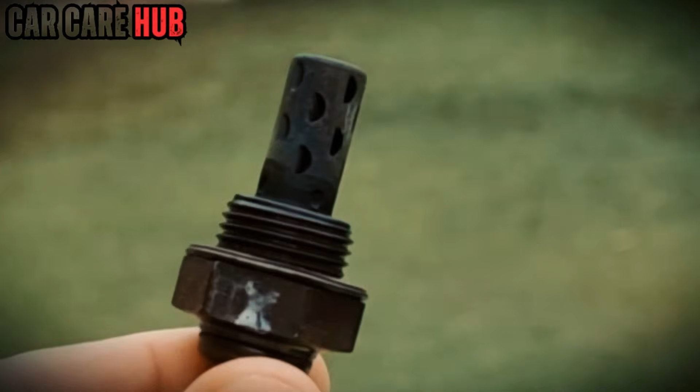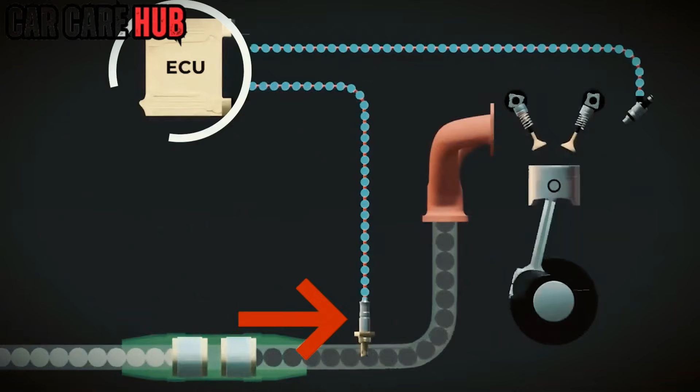Ever had a mechanic tell you that a $500 oxygen sensor replacement is the only way to turn off that glowing check engine light? Before you hand over your credit card, you need to know a secret the pros rarely share. Your sensor probably isn't broken, it's just suffocating. Over thousands of miles, a cocktail of cheap fuel and stop-and-go traffic coats your sensor in a thick, glass-like soot that effectively blinds your car's brain.

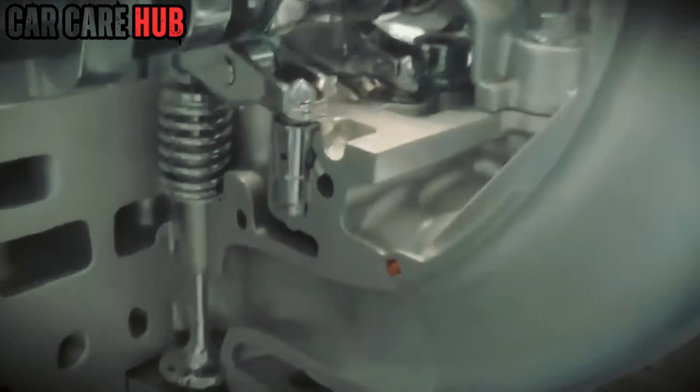When your engine can't see what it's burning, it defaults to rich mode, dumping extra fuel and tanking your MPG. Today, we're showing you how to perform a $10 rescue operation using 9 industry-vetted tricks to clean your O2 sensor, many without even turning a wrench. Trick number 9, the fuel additive tank-in method.

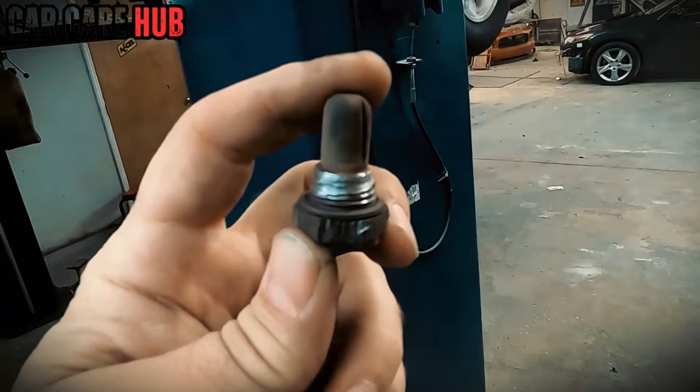Most drivers panic when they see a P0131 or P0135 code, assuming the hardware has physically failed. In reality, that sensor is usually just buried under a layer of carbon gummy bears, sticky, unburnt hydrocarbons that act like a blindfold. If you spend most of your time in city traffic, your exhaust never gets hot enough to burn this gunk off. Instead of a teardown, we start with a liquid technician.

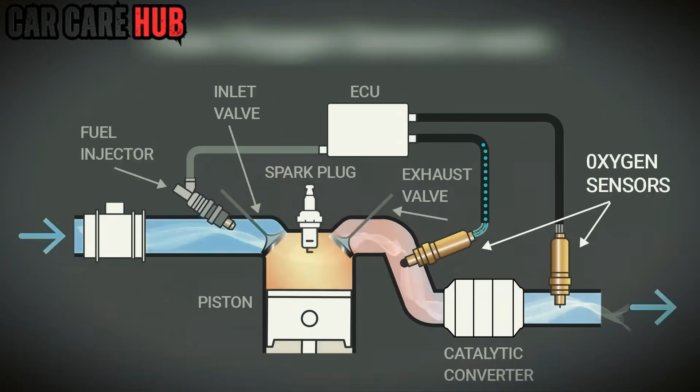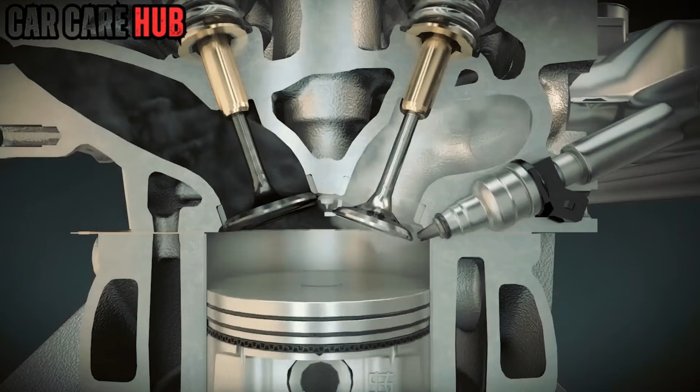You're looking for a high-performance fuel system cleaner, specifically one labeled O2 sensor safe or catalytic converter cleaner. These aren't your standard cheap detergents. They contain specialized polyetheramine (PEA) compounds that survive the combustion chamber. As these chemicals turn into a high-temperature vapor, they scrub the sensor tip as they exit the exhaust.

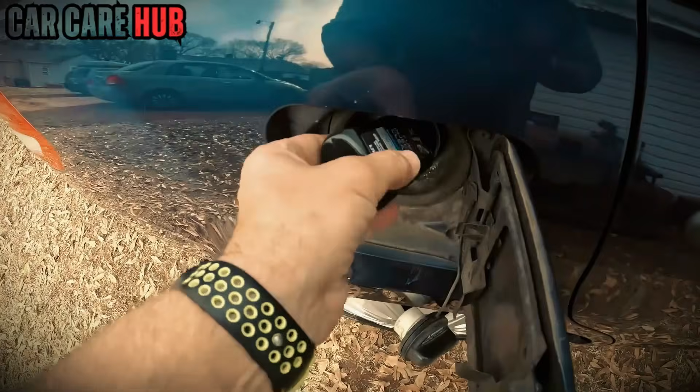Pro tip: for maximum potency, wait until your tank is at 1/4 full before adding the bottle. This concentration ensures the chemical-to-fuel ratio is aggressive enough to actually dissolve carbon. Drive it for 20 miles at varied speeds. You'll likely feel that low-end stumble at stoplights begin to vanish as the sensor starts seeing oxygen levels clearly again.

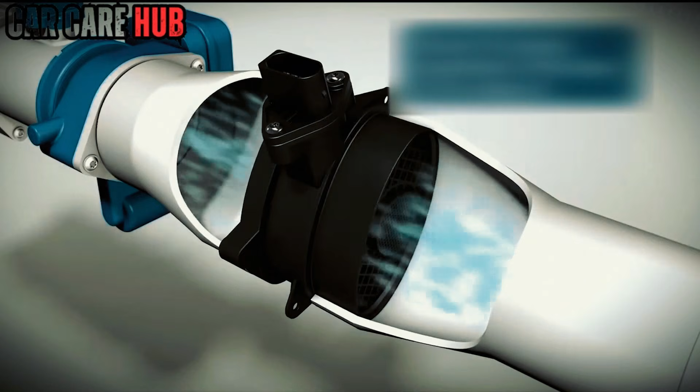Trick number 8, the intake vacuum sip. In a high-volume repair shop, time is money. A master tech doesn't have a week to wait for a tank of treated fuel to circulate. They use what we call a direct strike. This method turns your engine's own vacuum system into a delivery straw, pulling cleaning agents directly into the intake manifold.

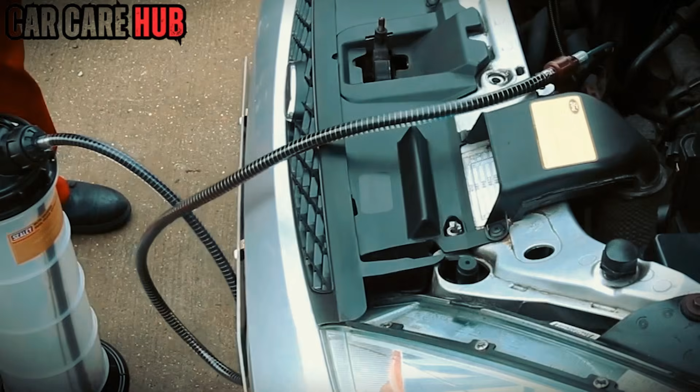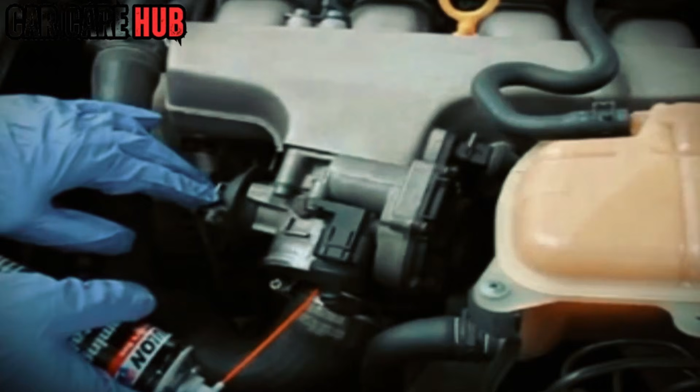By disconnecting a major vacuum line, typically the brake booster hose, and allowing the engine to sip a specialized aerosol cleaner while holding the RPMs at a steady 2000, you create a chemical fog. This atomized mist hits the O2 sensor at high velocity. It's essentially an internal pressure wash for the sensor's delicate zirconium element.

If you see a massive cloud of white smoke from the tailpipe, stay calm. That's just years of engine blindness being purged in real time. It's a 10-minute procedure that can instantly restore throttle response that's been missing for years. Trick number 7, the Italian tune-up.

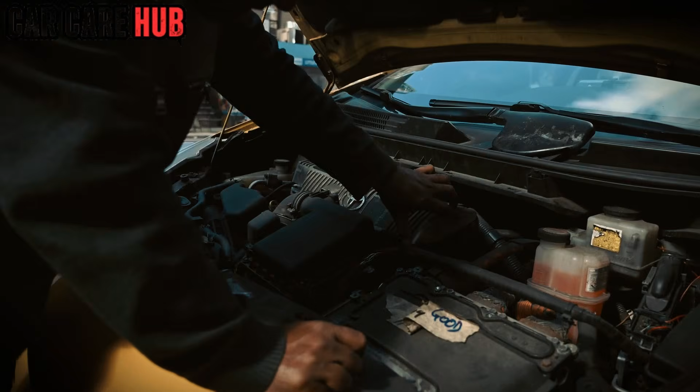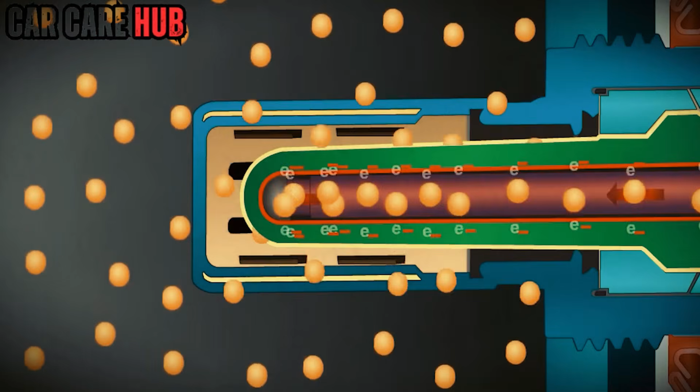Long before we had sophisticated scanners, old-school mechanics relied on thermal intervention. They noticed that grocery getters, cars driven only short distances, choked up much faster than highway cruisers. The reason? The O2 sensor needs to reach about 600 degrees F to even start working, but it needs significantly more heat to stay clean. The Italian tune-up uses no chemicals, just physics.

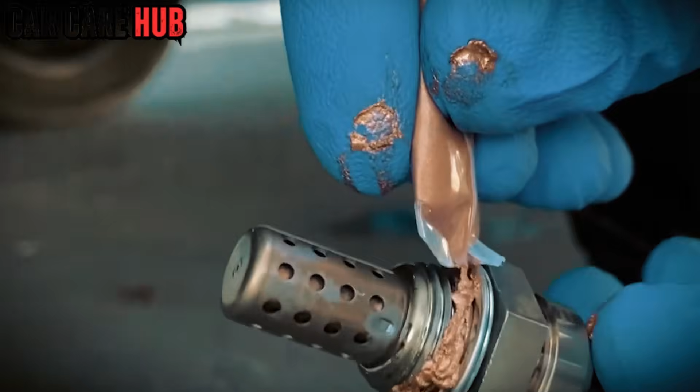By driving at highway speeds in a lower gear, keeping your RPMs between 3000 and 4000 for 15 minutes, you raise exhaust gas temperatures to their peak. This turns your exhaust system into a self-cleaning oven, incinerating soft carbon into a fine white ash that simply blows out the back. It's a zero-cost way to reset your fuel trims. I recommend doing this once a month to prevent carbon from ever getting a foothold on your sensor's tip.

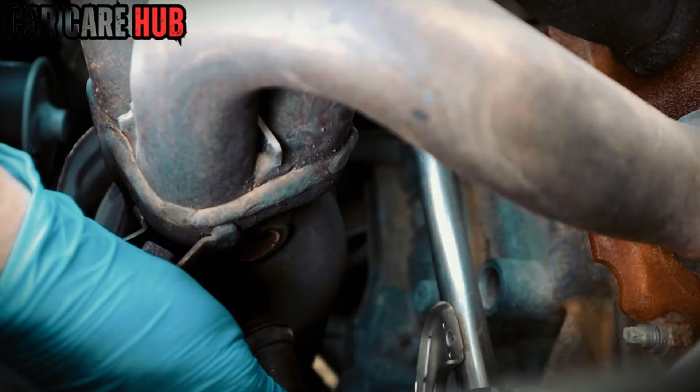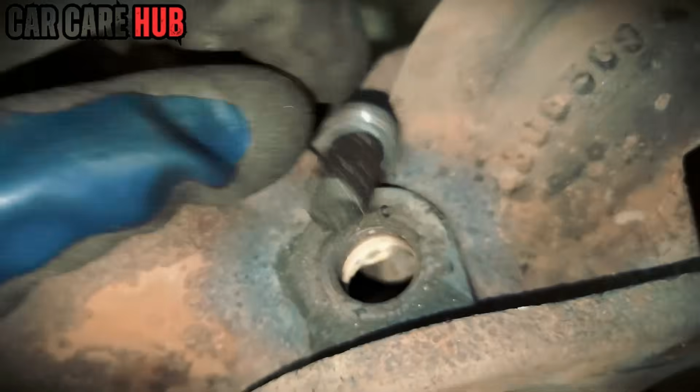Trick number 6, the vinegar and baking soda bubble. There's a common myth in the industry that once a sensor is poisoned by mineral deposits, it's scrap. I've seen countless DIYers fire the parts cannon, wasting hundreds of dollars because the carbon was baked on too hard for a spray to fix. But you can actually use basic chemistry to save it.

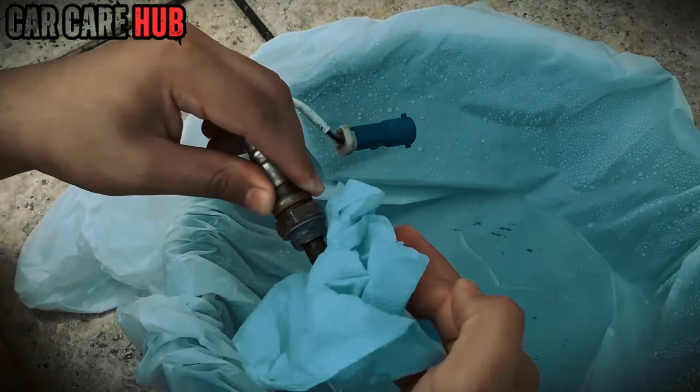This trick requires removing the sensor and submerging just the metal tip in distilled white vinegar. The mild acetic acid works to break down the calcified ash that thermal cleaning can't touch. When you add a spoonful of baking soda, the resulting CO2 reaction creates a mechanical fizzing that lifts loosened debris out of the internal sensing element. It's a pennies on the dollar recovery.

When the liquid turns murky black, you know you've just saved yourself a trip to the parts store. Just remember, rinse with distilled water and dry it completely before reinstallation.

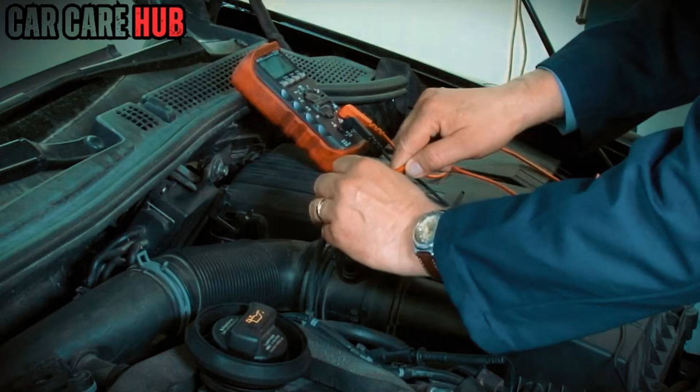Trick number 5, the gasoline or acetone bath. In performance shops where engines run rich and oil blow-by is common, sensors often get coated in a varnish, a plastic-like film that standard cleaners can't penetrate. This is the heavy artillery. You have to fight fuel-based contaminants with fuel-based solvents.

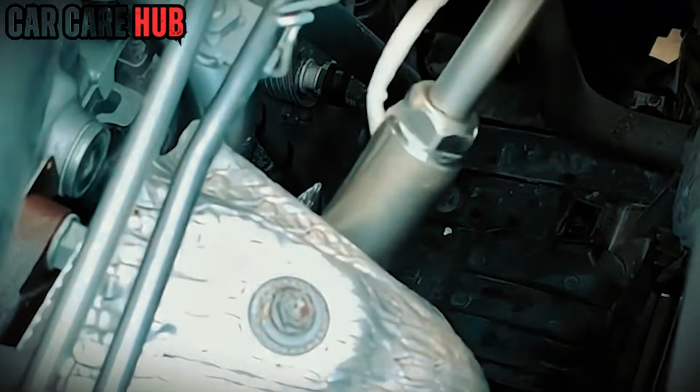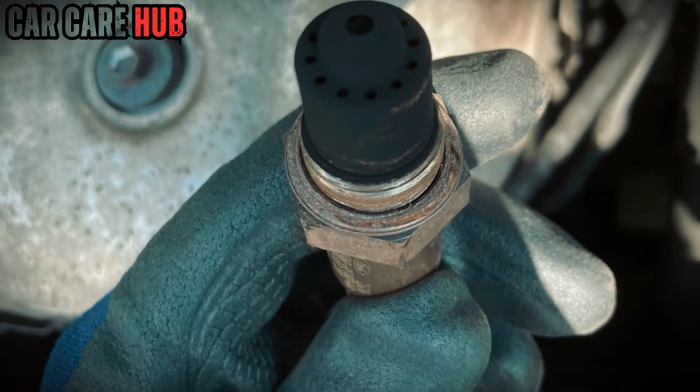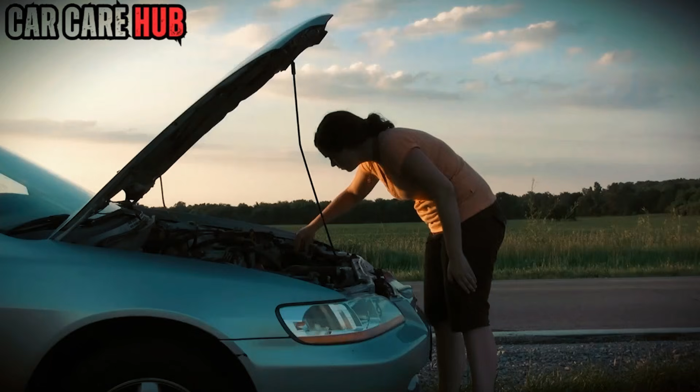By soaking the sensor tip overnight in a bath of gasoline or high-grade acetone, you're using industrial-strength solvents to melt away that greasy varnish. These chemicals penetrate the tiny ventilation windows in the sensor's shroud to reach the ceramic bulb inside. By morning, a sensor that looked like a charcoal briquette will often look like brand new stainless steel. If your idle has been surging or hunting, this deep solvent soak is often the only thing that can bring it back to a steady 800 RPM.

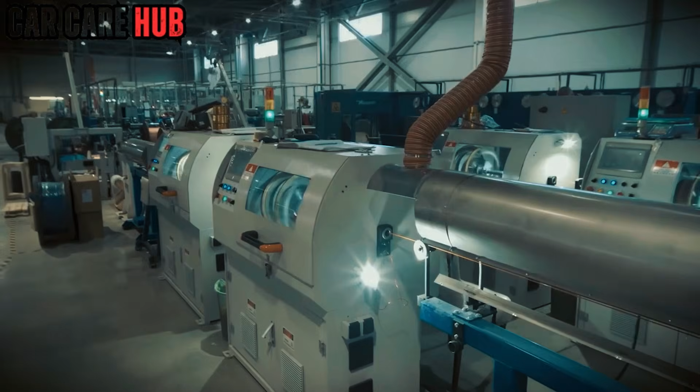Trick number 4, specialized oxygen sensor spray. Precision matters. A major mistake I see is people using heavy degreasers or brake cleaners on an O2 sensor. Those cleaners often leave behind a microscopic oily residue. Once that residue hits 600 degrees, it bakes into a permanent insulator, effectively killing the sensor for good.

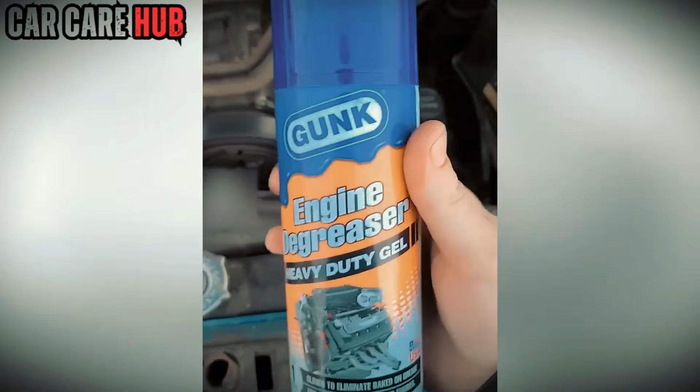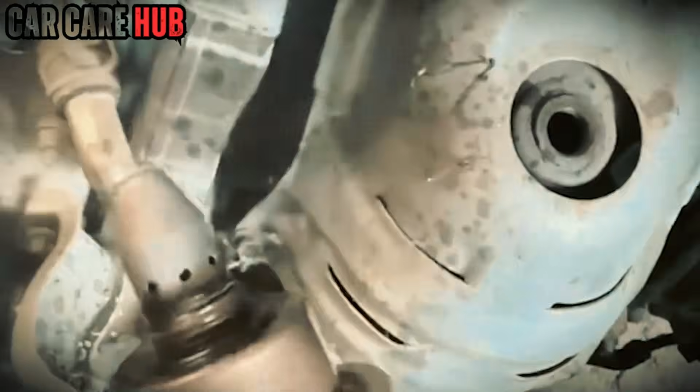Dedicated O2 sensor sprays are engineered to be zero residue. They flash evaporate in seconds. When you use this, you're blasting the spray directly into the shroud holes to flush out contaminants. It's a professional-grade dry clean for your engine's most sensitive probe. It's the most reliable way to get a professional result in your driveway without the risk of contaminating the delicate internal circuitry.

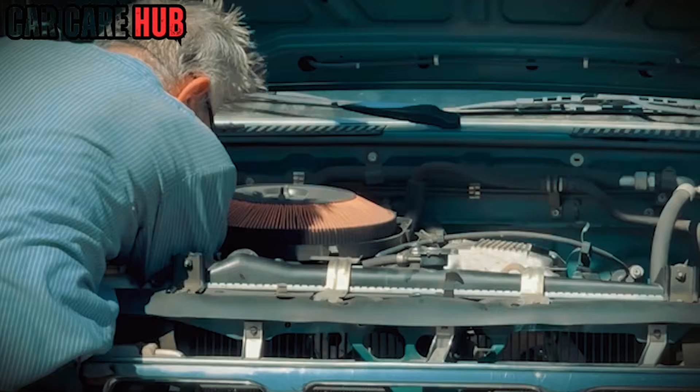Trick number 3, the soft nylon scrub. I once saw a veteran tech fix a dead sensor with nothing but a discarded toothbrush. Sometimes the issue isn't chemical, it's mechanical. Over time, the tiny ventilation holes in the sensor's protective shroud get plugged with hard, crusty deposits. If air can't get in, the sensor can't read.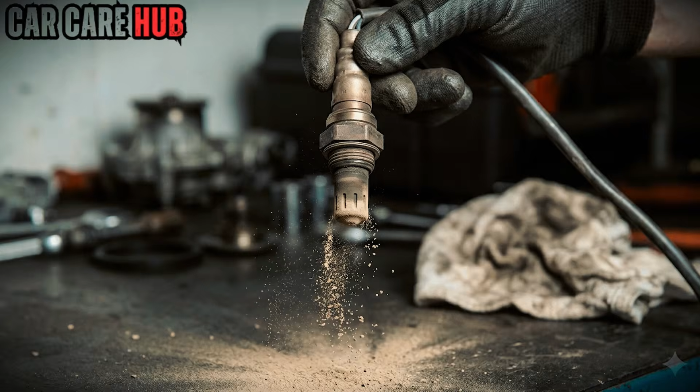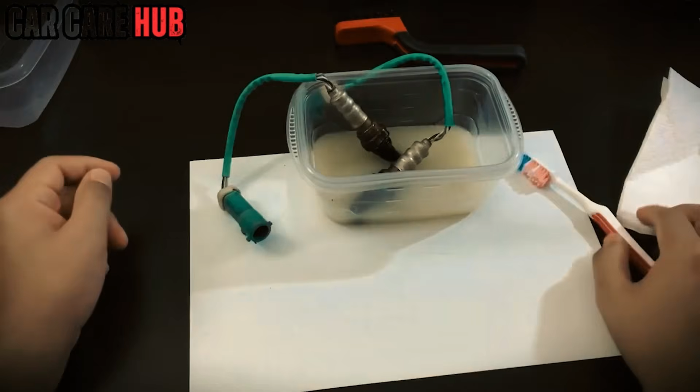Using a soft nylon brush, you can flick away these outer layers of crust. The goal isn't to make the metal shine, it's to clear the airways. Always hold the sensor tip down so the dust falls away rather than getting pushed deeper into the element. Never use a wire brush. Even a microscopic scratch on the internal ceramic can ruin the sensor's ability to generate voltage. This simple bit of manual labor can turn a choking engine into a smooth-running machine for the price of a used toothbrush.

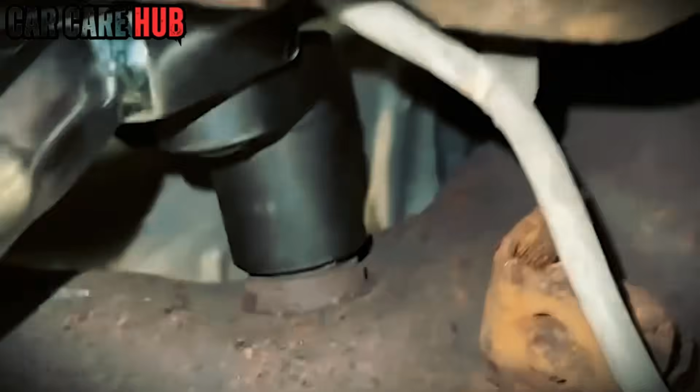Trick number 2, the penetrating oil creep. The biggest hurdle isn't always cleaning the sensor, it's getting the damn thing out. Oxygen sensors live in the harshest environment on the car, subject to thousands of heat cycles that weld the threads to the exhaust pipe. Using a giant breaker bar on a seized sensor is a recipe for stripped threads and a ruined exhaust manifold. The creep method requires patience.

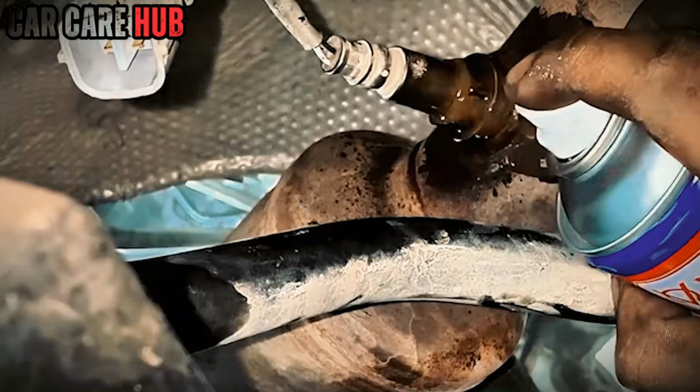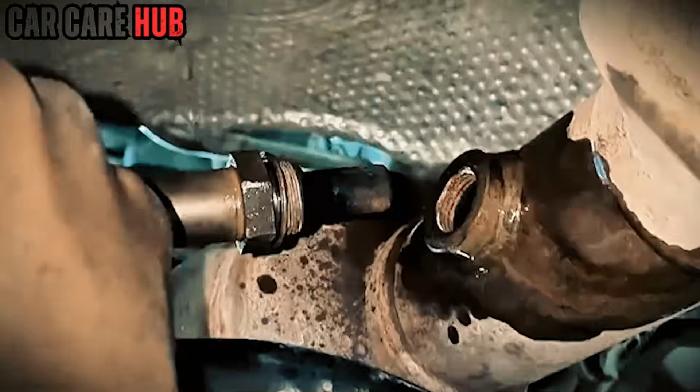Spray a high-quality penetrating oil specifically where the sensor meets the pipe while the metal is stone cold. Cold metal pulls the oil into the microscopic gaps via capillary action. Let it sit overnight. This dissolves the rust bond from the inside out, turning a nightmare job into a simple 10-second turn of the wrench the next morning. It's the difference between a 10-minute fix and a $1,000 exhaust repair.

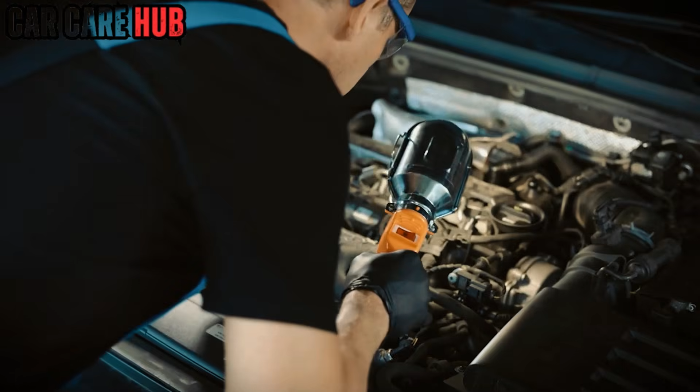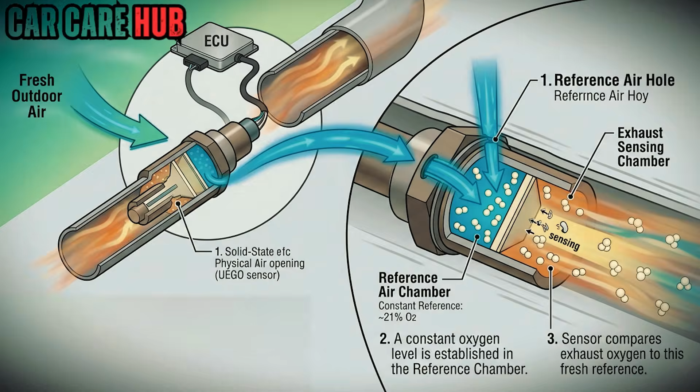Trick number 1, the reference hole clear. This is the holy grail of O2 sensor secrets. Most people think the sensor only cares about what's inside the exhaust, but the O2 sensor is actually a comparison tool. It needs to compare the dirty exhaust gas to clean, outside air to work.

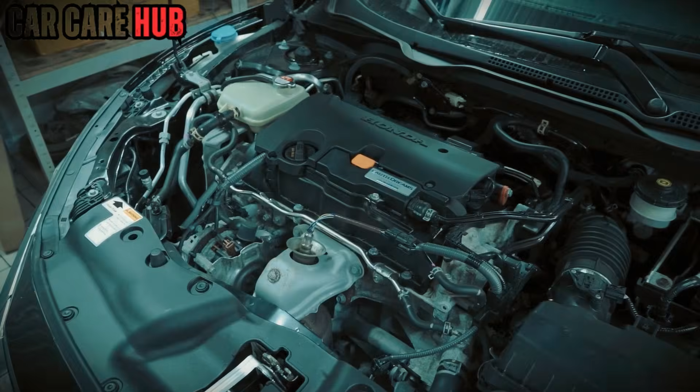That outside air enters through a tiny pin-sized reference hole on the body of the sensor, usually near where the wires go in. If this hole is plugged by road salt, mud, or even undercoating spray, the sensor suffocates and sends a false signal to the computer. You don't need chemicals here, just a quick blast of compressed air to ensure that reference port is clear. When you restore the sensor's ability to breathe outside air, you restore its sanity.

Before you spend half a paycheck on new parts, try these steps. Most broken sensors are just waiting for a little maintenance.